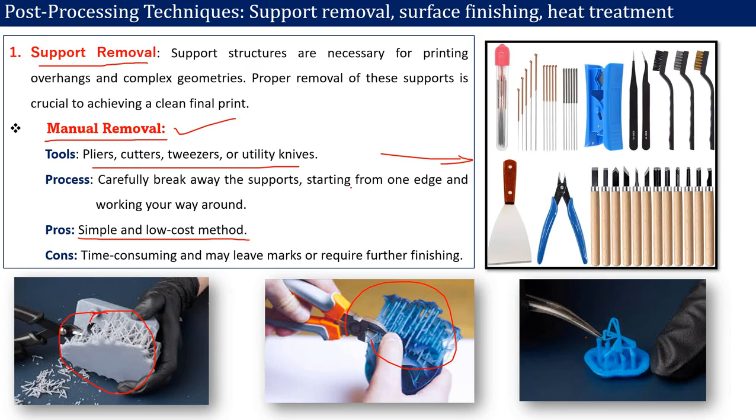The second method is soluble supports. For this purpose, PVA, that is polyvinyl alcohol, a separate filament is used. One filament is used for building the parts, and the other filament is used for building the supports. When using polyvinyl alcohol, if you dissolve it in water, it is soluble and gets removed.

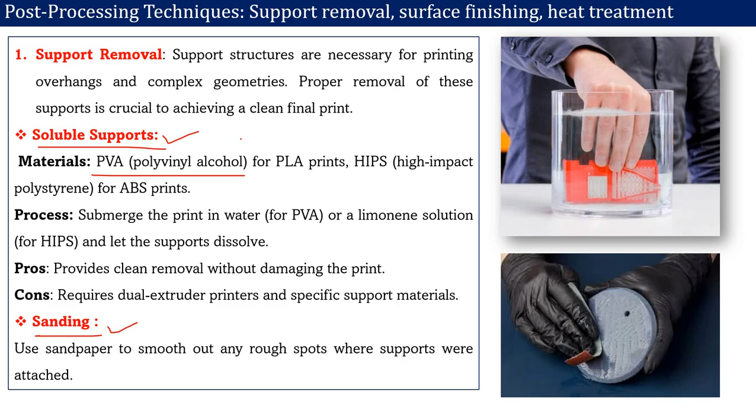Another method is sanding, using sandpaper to remove the supports. So we have soluble supports and sanding - these are the methods for removing the supports on 3D printed parts.

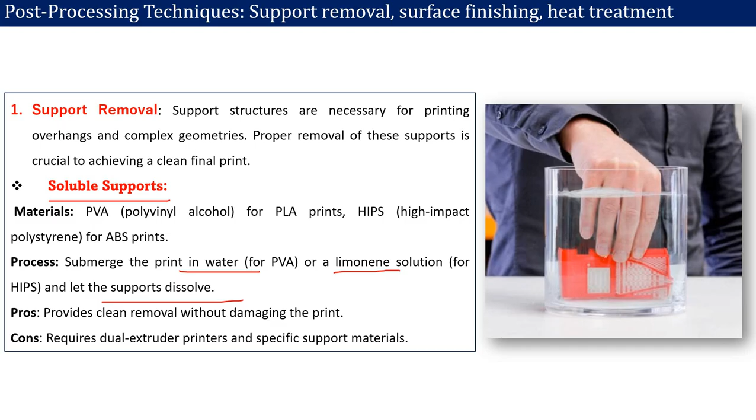We have discussed soluble supports. If you dip the 3D printed part into a solution or water, like limonene solution or water, the support gets removed or dissolved, and only the 3D printed part remains.

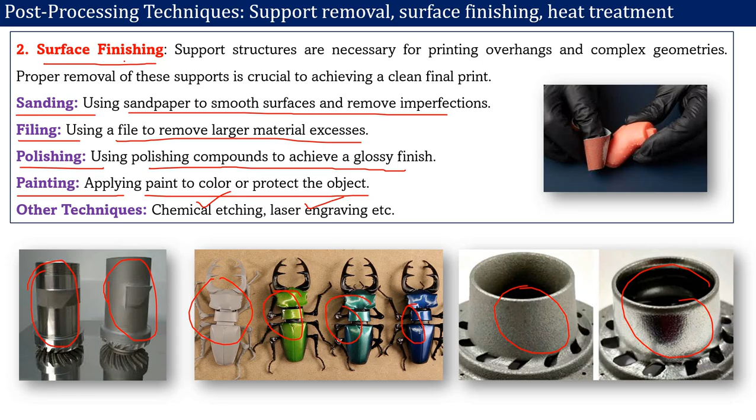This comes under surface finish. So these are the techniques that are used for surface finishing.

Now heat treatment. Some 3D printed parts require heat treatment to provide strength, durability, and other properties to the printed object. These heat treatment processes include annealing. For PLA, ABS, and other thermoplastics, we can put the part into an oven for a certain time at a desired temperature to provide heat treatment to the 3D printed object.

Another advantage of providing heat treatment to the 3D printed part is to remove stress. When we provide heat treatment to the 3D printed part, at certain temperature, it relieves the internal stresses from the 3D printed part.

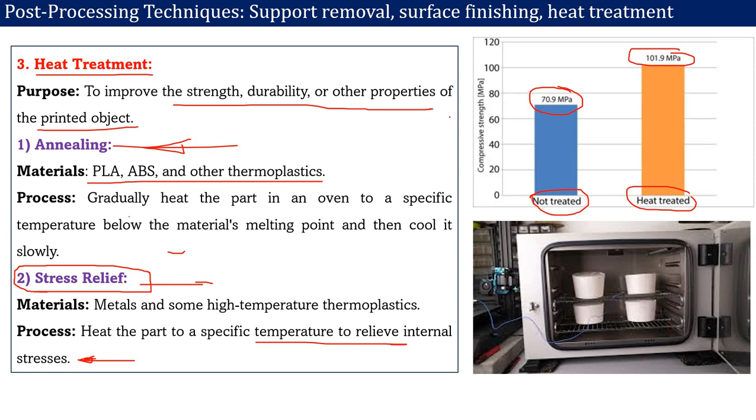Now once the part is ready after post processing, we have to carry out quality control and inspection. This essentially ensures that the 3D printed parts meet the desired specification and performance standards. Implementing a comprehensive quality control process helps identify defects early, ensuring consistency and reliability in production.

Now design verification: in quality control, you have to verify the CAD model to ensure it is accurate and complete, checking for errors that could affect the print.

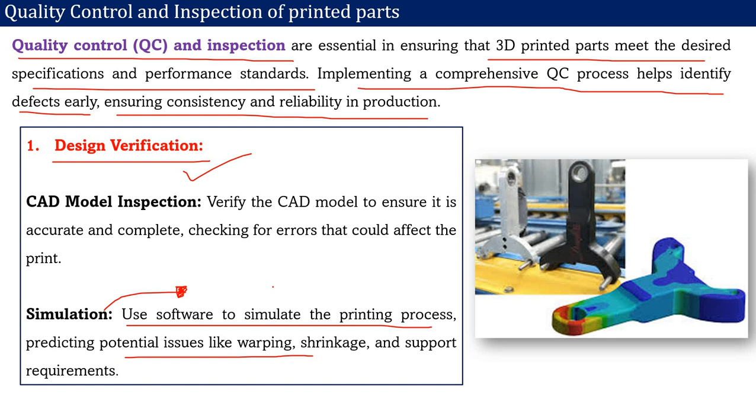This we can do in the earlier stage only, CAD model inspection. We can also perform simulation, which helps predict issues like warping, shrinkage, and support requirements. Simulation can be done using software like CAD, CAE, and other simulation tools.

Then material quality control. We need to decide earlier which type of material to use for 3D printing. You have to check the certification to ensure the filament or resin meets specified standards and comes from a reliable supplier, because so many suppliers are available in the market.

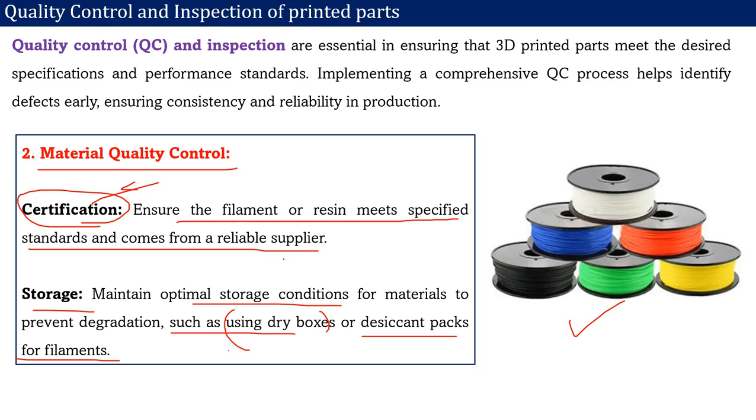Once you purchase the material, storage is very important. If you don't use the filament for a long time, it may get damaged. So you have to keep it in dry boxes or use desiccant packs.

Then printer calibration and maintenance. We have to check and calibrate the printer—bed leveling, extruder calibration, verifying nozzle diameter, and dimensional accuracy calibration. Follow a maintenance schedule for cleaning and replacing worn parts like nozzle, belts, and fans. That comes under quality control and inspection.

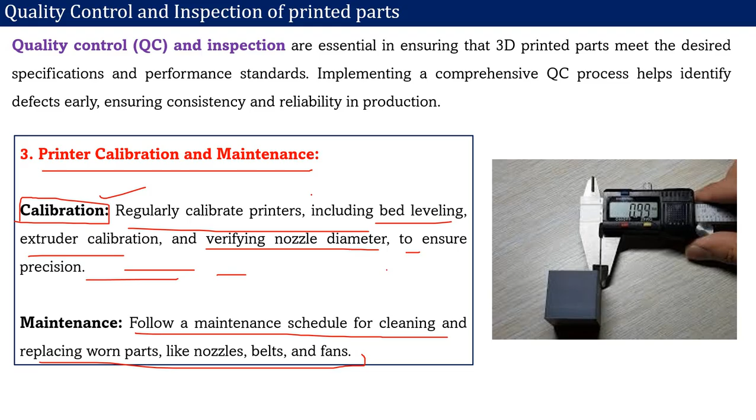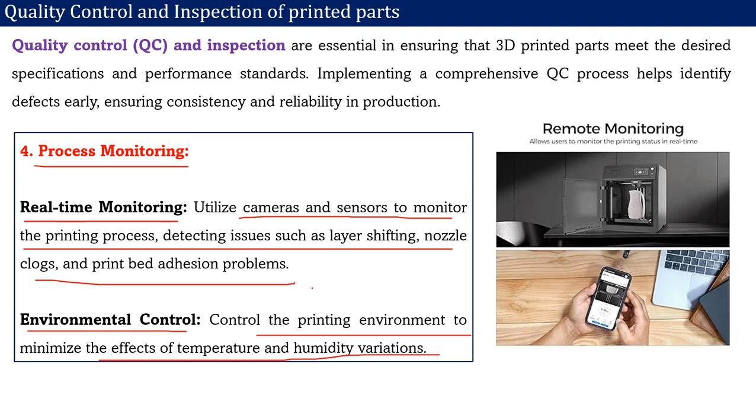Environmental control: control the printing environment to minimize the effect of temperature and humidity variation. You must keep the printer in such an environment that there is no environmental effect on the 3D printing process.

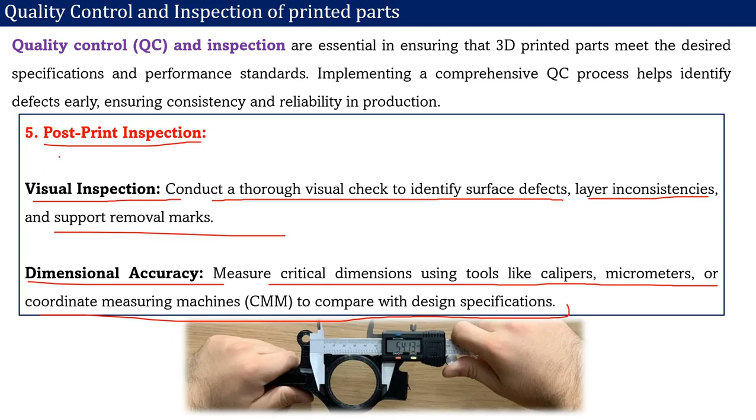Then post-print inspection. After this, you have to check the final product. It should undergo a thorough visual check to identify surface defects, layer inconsistencies, and support removal marks. Then check dimensional accuracy by measuring critical dimensions using tools like calipers, micrometers, or coordinate measuring machines to compare with the design specification. That is the post-print inspection.

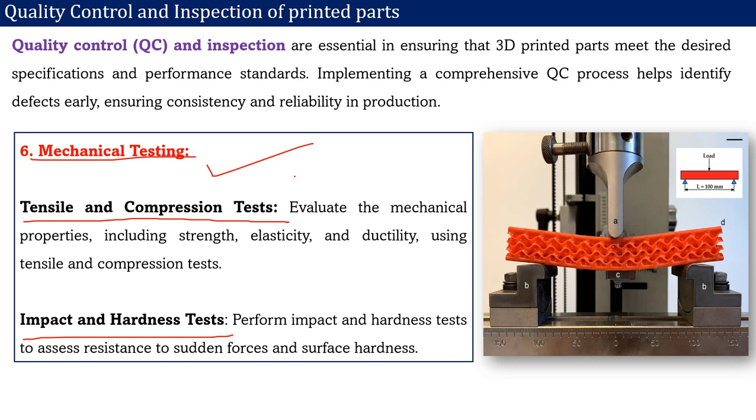After that, if your components are used for or take a certain load, you have to conduct tensile and compression tests or impact and hardness tests. This can be performed after the inspection, just to confirm that the printed parts can take the particular load whenever in working condition.

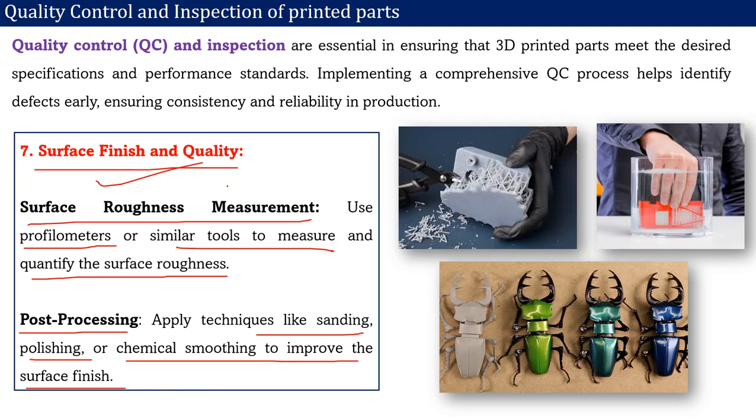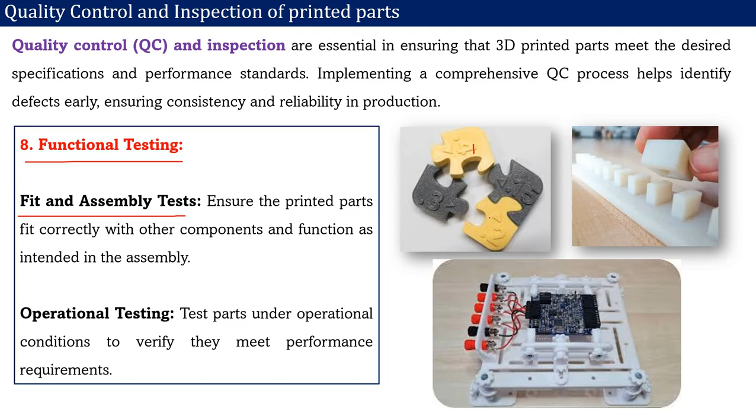Then functional testing. If we are using this for fit and assembly test, we have to check whether the number of parts fit correctly with each other. Operational testing: test parts under operational conditions to verify they meet performance requirements. If any movement is needed between them, that must be checked—that is part of functional testing.

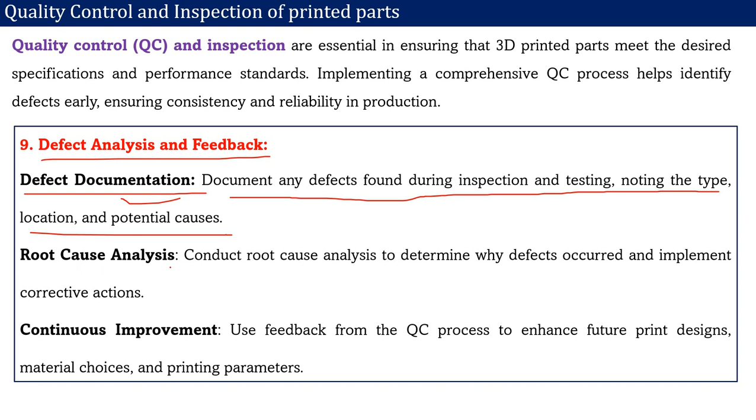Then defect analysis and feedback. Defect documentation: document any defect found during inspection and testing, noting the type, location, and potential causes. Root cause analysis: conduct root cause analysis to determine why the defect occurred and implement corrective action.

If defects are there, we have to go back to 3D modeling, the first step, then the 3D printer software, where we change the parameters. That corrective action we have to take, along with continuous improvement.

Use feedback from the quality control process to enhance future print design, material choices, and printing parameters. This comes with experience only. With experience in 3D printing, you know how to design the model, reduce printing time, and save material.

So this is all regarding quality control and inspection. Thank you very much.